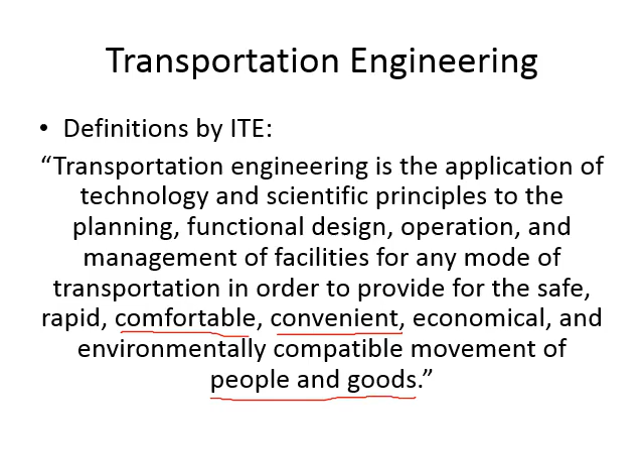Now moving forward, ITE also gives us a definition of traffic engineering, which is somewhat similar to transportation engineering, but you can see here, while we are talking about planning and design and operation and management, we are now focused on one part of transportation systems, which is roads, streets, and highways. Okay, so traffic engineering is basically planning and designing and managing traffic which will operate on roads, streets, and highways. And then obviously you need the auxiliary systems as well, the complementary systems, such as the networks of roads and the networks of taxis and buses and these things.

And then you have the terminal facilities, parking areas, bus stops, bus terminals, and you have the abutting lands, the lands which are beside the roads. So these are part of your design. They should be part of your planning. And obviously then highways are more important than other systems because they support other modes of transportation. For example, in getting to the airport, you need to go through the highways. Similarly, in getting to a bus stop, obviously you need the facility to get to the bus stop, and that facility is normally a road.

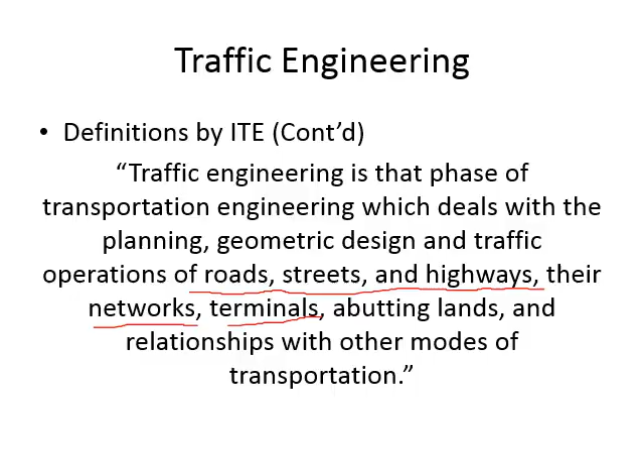So now let us talk about the objectives of transportation or traffic engineering. And the primary objective is safety. And why are we keeping safety at the top? Because it's understandable. First of all, safety is always the primary objective for any discipline of engineering, whether you are designing buildings or bridges or anything else. But for traffic engineers, safety is a bigger issue because of the statistics which you see on the slide here.

So you can see it is the second most prominent but most preventable cause of death worldwide. Okay, so you can prevent it, but it is still causing so many deaths. So whenever you have a road accident and you analyze it, you will find that there was something you could have done to prevent it. It is not like you had a heart attack or something like that. Okay, or it's not like an earthquake where you cannot do anything to prevent it.

Road accidents are preventable, but still there are so many deaths, and according to WHO, it has been labeled as a killer disease, although it's not a disease. It takes the life instantly, but still, because they don't have any other terminology for that.

Just to give you an idea about the number of people who are involved in accidents, traffic accidents take 1.35 million lives every year across the world, and there are about 50 million people who get injured. And most of these people become disabled because of the accident. They lose their hands, or their legs, or they suffer some other sort of loss which is permanent.

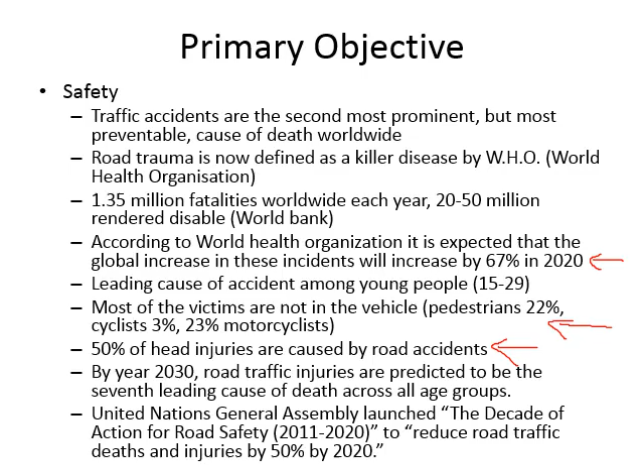So this was the primary objective, and obviously you cannot forget about other things. So other things include the speed, like I told you, and speed is a relative term. Obviously, we are talking about roads, so you are not expecting a speed of 200 kilometers per hour, what you get with a plane, or with state-of-the-art rails. So we want the speed which is expected by the user. The travel time should be within the traveler's expectation.

And then comfort. Okay, so we need to make sure that the riding quality of the road is sufficient and the delays are not driving the drivers crazy. This is what we mean basically. The roads and the traffic system are not driving you crazy. You are still in your senses. Okay, so comfort as much as possible.

Convenience, I told you, which is the access to the facilities, how easily you are allowing the users to access the facilities, how easily he can come to the main highway, how that highway is connected to the facilities which are of use to him. Okay, the banks, the hospitals, the usual sort.

Economy, you know, so you are making a trip and it is unusually long, or you are taking too much time on the road because of congestion, then obviously it is hitting you economically as well. You are losing time, and time is money. You are losing fuel, and fuel obviously you have to buy.

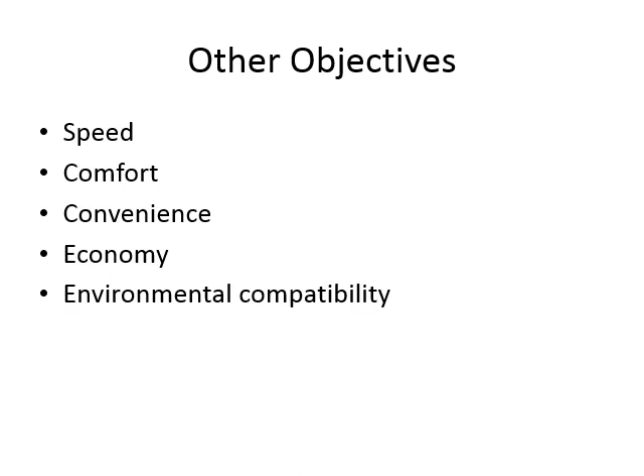Okay, what are your responsibilities, ethical responsibilities, and how you are liable to your clients and customers? Okay, so there are a few things which you have to understand to get the sense of your responsibility. The main difference between a traffic engineer and any other sort of engineer is the number of users who are using your design facility on a routine basis.

In a peak hour on any sort of highway, you have thousands of drivers who are driving on that highway in one hour. So you can imagine how many drivers would drive on it in the whole day, and then you can multiply it by the whole year. So you can imagine how many people you are affecting because of your design and because of your management, and on what basis these drivers are coming daily to your facility.

So it's not like I come to the building, I don't like the lift, and I go back and take the stairs for once. No, it's a road. If you do not design it properly, if you are not managing it properly, people are getting affected every day, especially when they are going to their offices and schools and universities. So you can imagine you are affecting their productivity. You have to understand your responsibility.

It's a huge responsibility. So you have to keep on increasing your knowledge and get acquainted with state-of-the-art technologies to make sure you can enhance safety within the resources which you have. Then the other problem which you would face as a traffic engineer is the number of participants. Designing and managing a road involves a lot of people. I just talked about the number of drivers. These are all participants in your design.

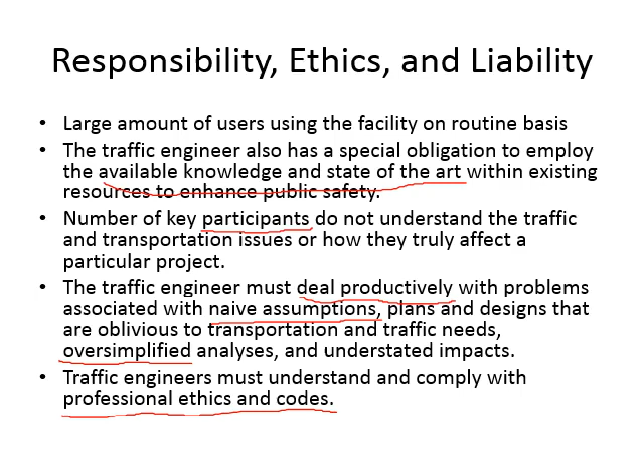So what do we mean by ethics? First of all, focus on your area of expertise. Finance, economics, management and construction management are affecting your project, but these are not your areas of expertise. So you have to trust other people. This is part of the ethics. You don't put your nose everywhere.

You do your job completely and thoroughly. Don't leave any stone unturned. Make sure you have given your 100%, or like nowadays they say 110%. I don't know how you do that, but you need to do that. You have to be honest with everybody, not just with your client.

You think that, okay, the client is giving us some money, so we have to be honest with them and let the others be. No, you have to be honest to everybody, because you are affecting their lives. So your own employees and the public, you have to take all of them into account, and you have to be honest with them. If because of your design the area will change and it will have some negative impacts, you have to be honest with them.

Obviously your project will have some positive impacts as well, but you cannot hide anything. So try to work as best as possible. This is part of the ethics. And you have to protect the community from any liability. Community is basically the ministry or the administration which is in charge of the traffic system. So if you are not doing your job properly, they are liable to respond to the public.

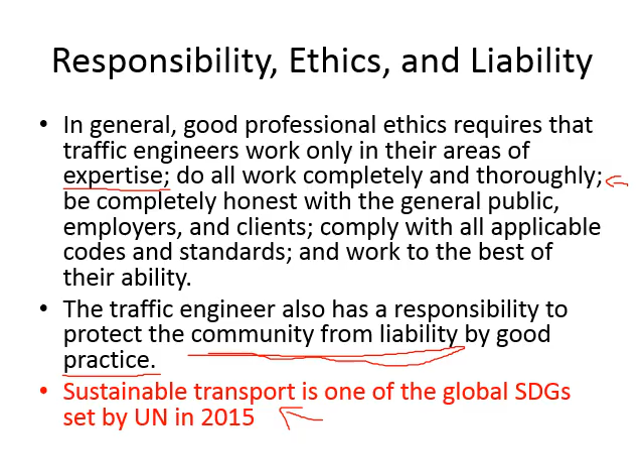One more aspect that you have to look at deals again with the problem of naive assumption or oversimplification. Sometimes you build a road to reduce congestion, and you feel that now we have 2 lanes, make it 3 lanes, it will solve the congestion problem. But what happens normally is, you increase the number of lanes or build a new road, and because now they have more space, people may be taking extra trips on that highway. Maybe people who were not coming to this route now come because they feel it's a new road, so they can fly over it literally.

So it increases the demand of the road, the use. We call it the induced demand, the demand which is induced because of the expansion in the road network. And if the demand keeps on increasing, eventually you will face congestion again. So you have to be careful about that. This makes your life more complicated as a traffic engineer.

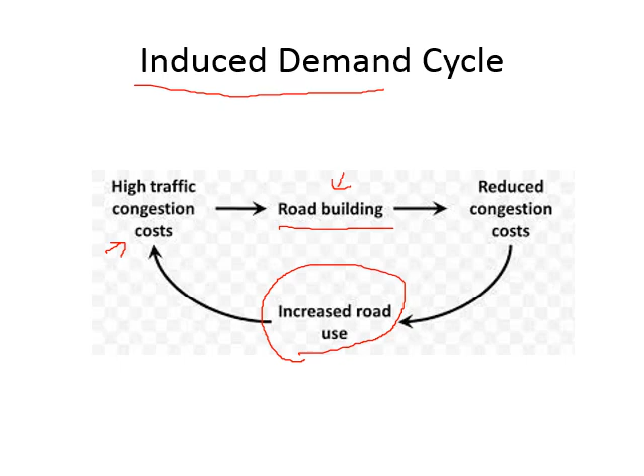There's a term which we use, known as due care, and that basically means that you have to justify all your actions and all the planning you have done on some objective basis. Nothing can be arbitrary. You cannot say because I feel like that, or it seems correct to me. Nothing is based only upon your judgment. Your judgment should be supported by some evidence: I am building a new road here because these are my calculations, and if the new road is built, this is what is going to happen. Or you can refer to some other city that did this sort of step, a new type of signal, and this is what happened.

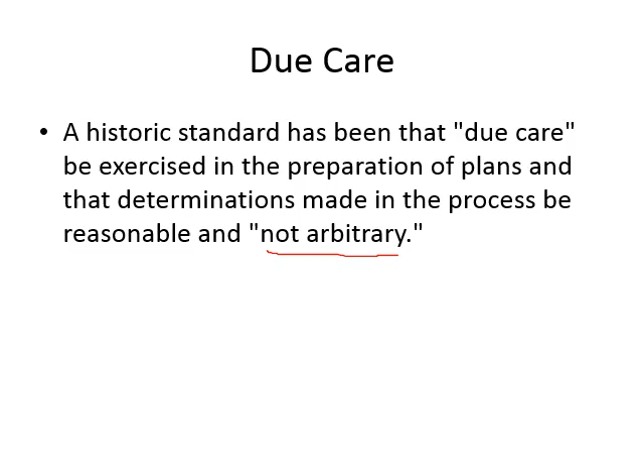For example, in Bahrain they started the flashing green signals in 2019. Before they put these flashing green signals on more than 100 locations, they did a study on 2 locations. Flashing green signals are already used in other countries, but you cannot go by that evidence, because those are other countries and they may have other problems. So in order to execute their plan, they needed evidence. They did it on 2 locations to gather the evidence, and then went on with the bigger plan, installing it all across Bahrain. This is what we mean by due care. You cannot just copy paste things from other locations or go by your own judgment. You have to support it with evidence.